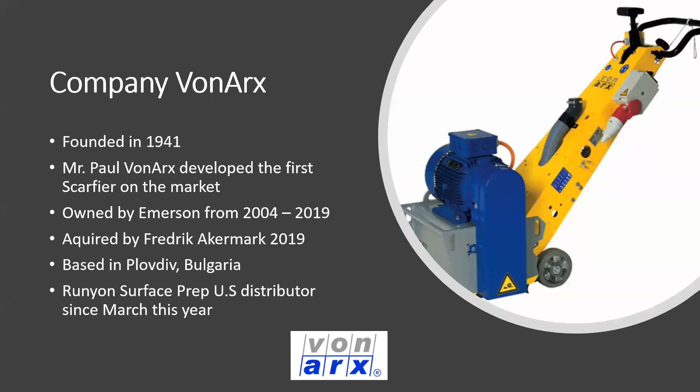A little bit about myself. So I've been around the surface prep industry for nearly 27 years, but that's been through vacuum cleaners. I was the global sales director for Pullman Ermator from 1993 until 2017. I moved to the United States in 2007 and started up Ermator USA in Tampa, Florida. And in 2017, we divested Pullman Ermator to Husqvarna Construction. And I spent the last 3 years as Global Business Development Manager for Husqvarna Surface Prep Division.

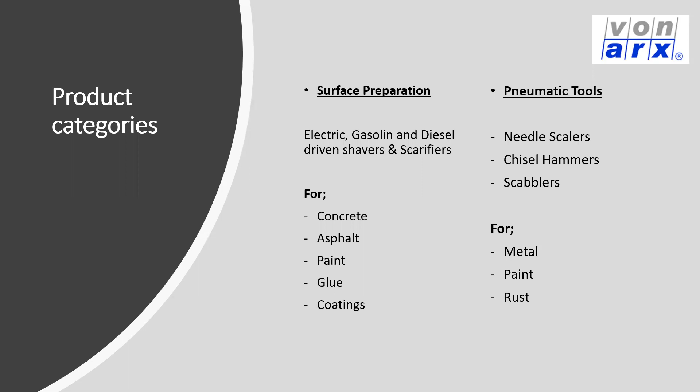So our product categories, it's the surface prep, which is shavers and scarifiers. We offer them in electric, gasoline, and diesel power. And the other line is pneumatic tools, where we mostly sell to the maritime sector, to vessels, offshore, ship, mines, and industrial paint. It's needle scalers, chisel hammers, and scabblers. We're going to focus on the shavers and scarifiers today.

So like mentioned before, scarifying is an old method. It was actually the first mechanical method of surface prep. And later came, as you know, shot blasting and grinding. And in recent years we got the planetary grinding systems. But there's still a lot of upside with scarifying and shaving. It's a low cost of equipment investment. The largest machines cost between $17,000 to $19,000. Low cost of consumables. The cutters used on scarifiers have long life and cost about 1/10 of most diamond brands out on the market today.

Very low maintenance and repair cost. There's not much that can go wrong with a scarifier or a shaver, so very seldom you have to send them for repairs. A simple and fast job site setup. The drums are on the machine when you get to the job site, so it's mostly just plug in and go. Smooth and flexible operations. The machines are not so heavy, not so big. And minimal training. It's very easy for the operator to use these machines, so there's minimal education needed for the operators.

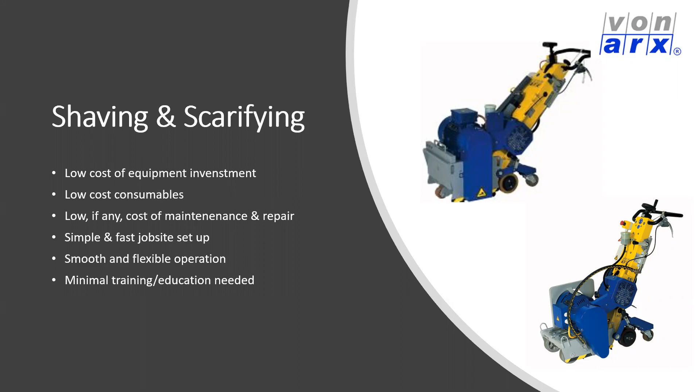Okay, so what are they used for? I mean, removing coatings, of course, epoxy, grooving concrete for anti-slip, correcting concrete joints, and of course, especially in the United States, eliminating trip hazards, doing lippage removal, concrete stock removal for fast aggregate exposure, and removing traffic lines, rubber, and other dirt on the surface.

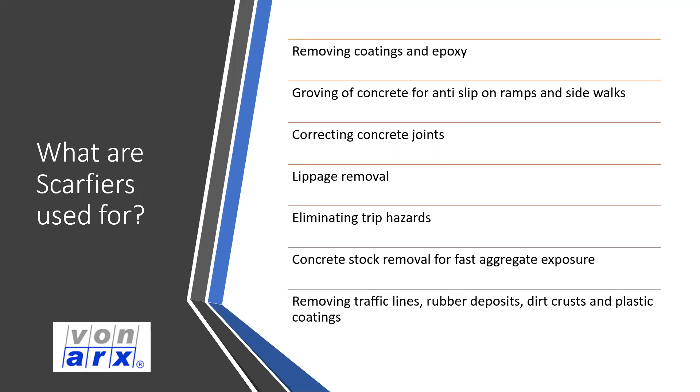Looking at the cutters, there are different kinds of cutters. The ones you see on the screen now are the most used, and the ones we use as standard on all Von Arx products. It's a steel cutter with tungsten tips on it. I would say 85 to 90% of the time using a scarifier, this is the tooling you will use. Use it for roughening the concrete and to remove old coatings. The small cutter used on the smaller machines has 5 tips, the medium size 6 tips, and on the large cutters you can use 8 or 12 tips. Many times they want to use the 12 tip because you get less vibration on the machine, and the more tips you have on the cutter, the less wear you get on them. But of course it also gets a little bit less aggressive on the surface.

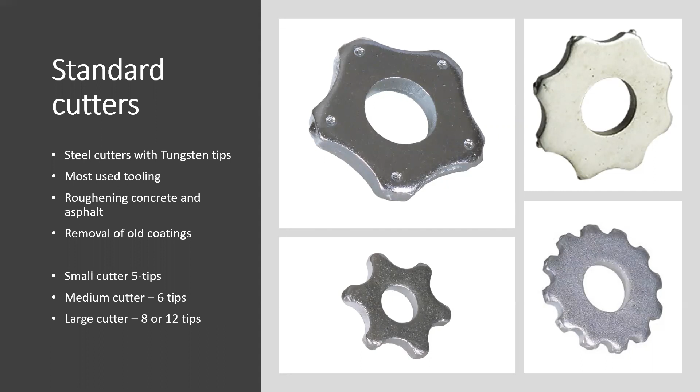There are also beam cutters. These are mainly to remove paint. It only touches the surface and makes a very minimal change of the structure on the surface. You take off paint or line marks and stuff on asphalt. And these are available for all machines as well.

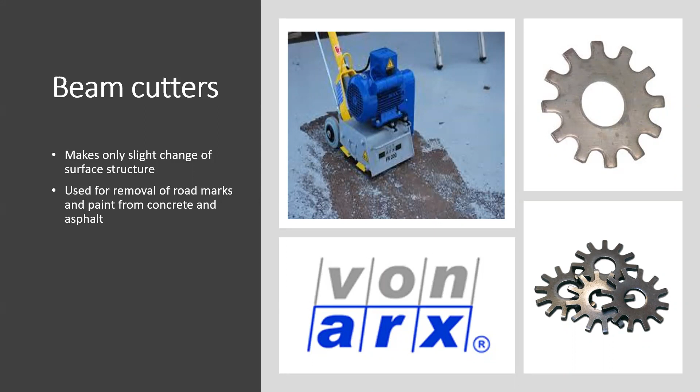Then you have the milling cutters. This is a more aggressive cutter than the other two. It's for removal of coatings and thermoplastics, and of course road marks. This has a lot more impact on the surface than beam cutters and pentagonal cutters. There are different widths of these cutters. The wider they are, the more impact they make on the surface, and it actually damages the surface a little bit more. So for concrete you would use thinner milling cutters, and on asphalt you use the wider ones.

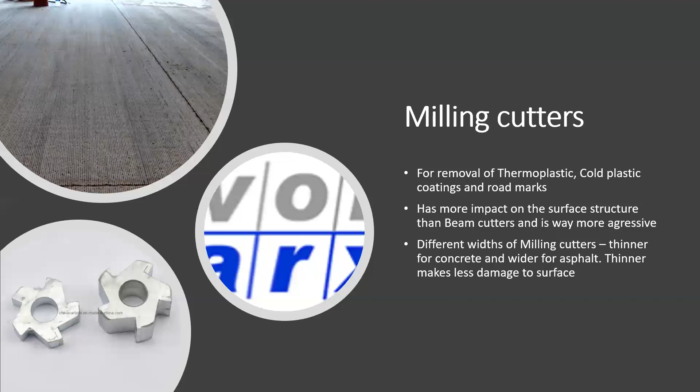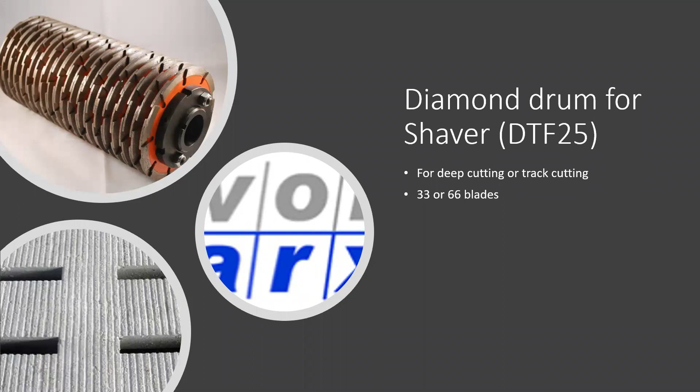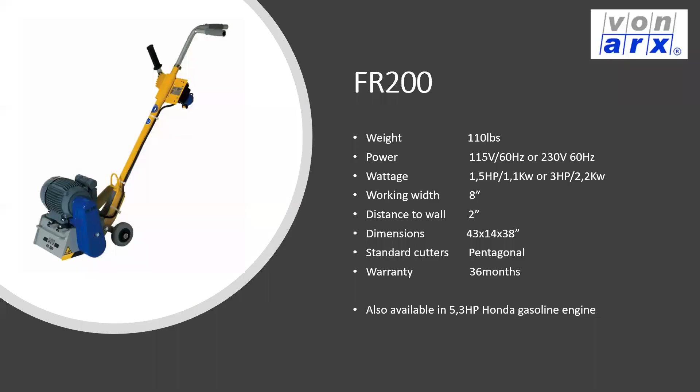So there, and then we get to the machine. The FR200 is the smallest machine we have. We offer it in both 110 volt and 230 volt in 60 hertz for American voltage. Weight is only 110 pounds, and the working width is 8 inch. And as you can see, you get quite close to the wall, only 2 inch distance to the wall.

And as mentioned, the pentagonal cutter is what it's called. It's the one with the tungsten tip on it. And the warranty on all electric machines is 36 months. This machine is also available with a 5.3 horsepower Honda gasoline engine.

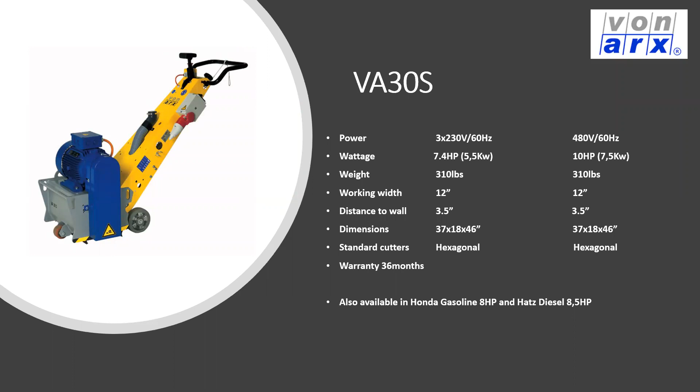The larger unit is the VA30S. It's still a manual machine, a push machine. We offer it in 2 American voltages, low voltage 208 to 240 volt and 480 volt. 7.4 horsepower on the low voltage one. And you see the working width is 12 inch and distance to wall 3.5. So for such a large machine, you actually get quite close to the wall with it.

Hexagonal cutters for this one, which is the 6-tip tungsten tip cutter, come as standard. And the warranty is 36 months. And this unit is available both in Honda gasoline, 8 horsepower, and an 8.5 horsepower Hatz diesel.

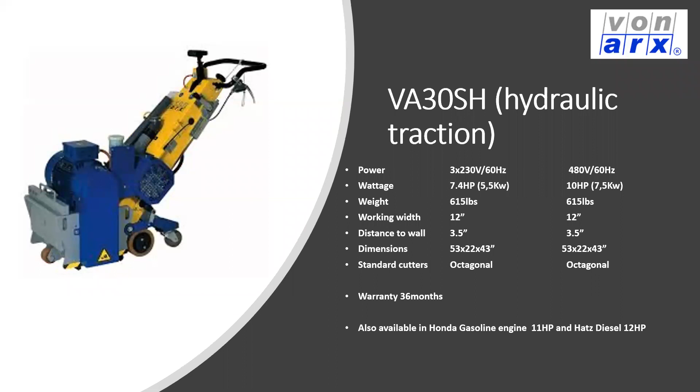The next one is the same machine again, but this one is self-propelled, so it has hydraulic traction. Same voltages, and you can see the weight is almost doubled, so the weight is now over 600 pounds on this machine. 12-inch working width, and octagonal cutters on this one, which would be the 8 or the 12-tip tungsten cutter. Also, this one we offer in gasoline and diesel.

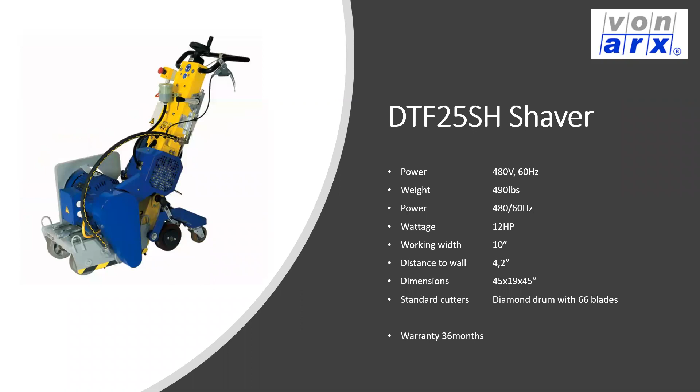And then we have the shaver, 10-inch working width. We offer it only in 480 volts, 500 pounds, 12 horsepower. And you get 4 inches from the wall with this machine. And it comes standard with the diamond drum with 66 blades.

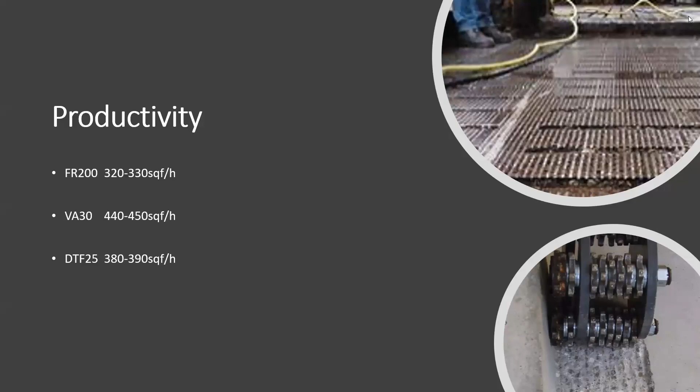And the productivity on the machines, you will scarify up to about 330 square feet an hour with the small FR200 and 450 square feet with the VA30 and the 30SH. And the shaver close to 400 square feet an hour and up to half an inch on that DTF 25. All right. That was about it. Anyone have any questions?

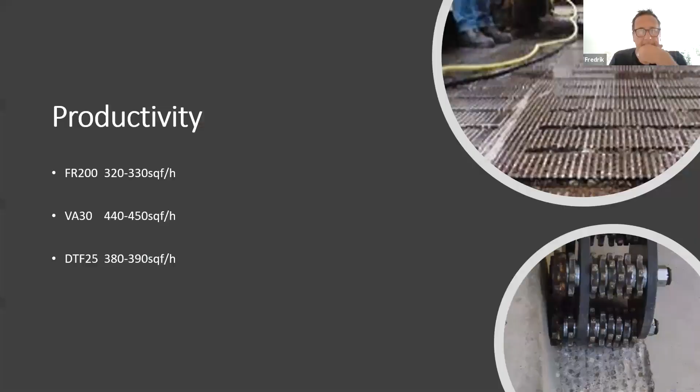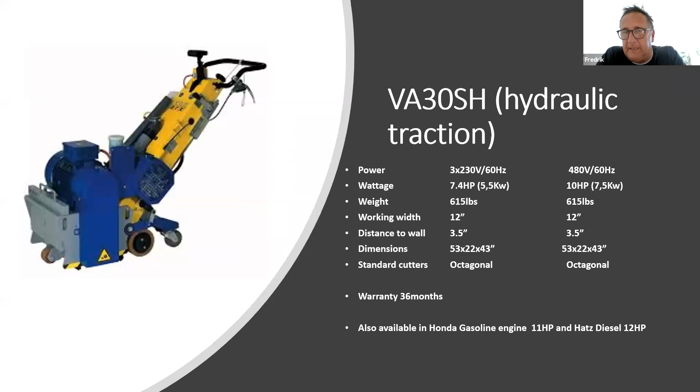Scott Metzger asked, how narrow can you cut with the smaller unit? How narrow? What do you mean with that? I'm not sure. To the wall? Yeah, I think that's probably what he meant. Yeah, so on the small unit, you can be 2 inch from the wall, distance to wall. And on the larger ones, it's 3.5 inch. And with the shaver, about 4 inch from the wall.

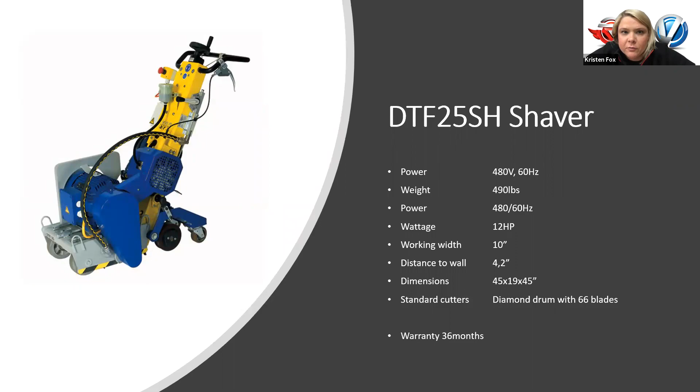So the question on one side here says, what's the working width of one pass of the FR200? 8 inch. Okay, got it. Yeah. Cool. Great.

A question that we have here too: in our industry, we're talking a lot about surface preparation equipment. I think right now the major surface prep piece of equipment is a standard grinder, whether it's planetary or rotary. In terms of the surface prep, when would you want to use a scarifier versus a grinder? Or what are some of the pros and cons of using a scarifier versus a grinder, Fredrik?

I think when you have small areas where you have unevenness or lips and stuff that you want to grind down quickly, you would use the scarifier. You also have small areas where you just want to do a quick surface prep. In a smaller area, it's much easier to get in with the scarifier and just cut that off. And it's very cheap, the tooling cost and everything, easy setup.

Also, we've seen the shavers are often used on larger areas, when you really need to grind down a large amount, go deep with it. When you don't want to use bush hammers, it's a good alternative to bush hammer tooling on the grinders because it is cheaper.